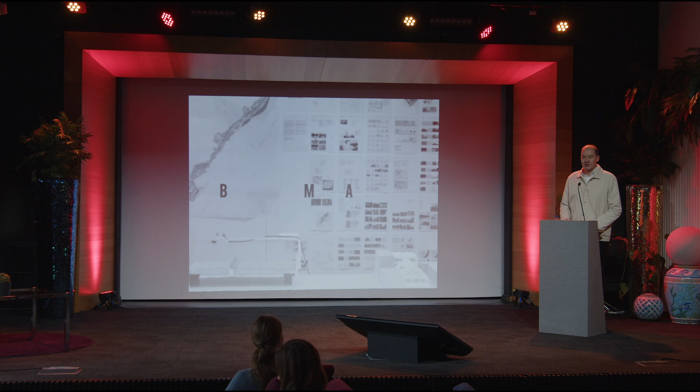Hello to everybody. Firstly, I would like to apologize because I'm having a stubborn flu. That is not due to your weather. I imported it from Brussels, because your weather is in fact very much like Belgian weather now.

I will be talking about circular architecture today, but with a special focus on the reuse of buildings, adaptive reuse of buildings. I thank you for the invitation, and I think it's very important that in a country like Estonia, this circular architecture is put forward. It proves that you're, in fact, one of the interesting countries in Europe who are working on that subject.

And I can imagine that adaptive reuse of buildings is a special thing in your country, because it might be that, in fact, you want to get rid of a lot of buildings from the Soviet period, for instance, because there is a kind of emotional connection with it. Or you're not sure about the quality of the construction of those buildings. There is no certainty about the materials used. So it might be very hard for you to develop this kind of ideas. It has been hard for us in Brussels as well. We have a kind of hate and love relationship with a lot of these buildings that I will show you, that are mostly office buildings from the 1960s until the 1990s.

But first, perhaps 10 minutes on what the bouwmeester is in Brussels. So not only in Brussels, in Belgium, since something like 2000, we installed a system of bouwmeesters in several cities and regions. It was inspired on the Dutch tradition of the Rijksbouwmeester, the national bouwmeester, that exists something like 200 years. It has been existing before in Belgium, but the tradition had been completely lost. So we imported the idea around 2000, and then we developed it and we made it better than in the Netherlands. So now they're looking to us how we are dealing with it.

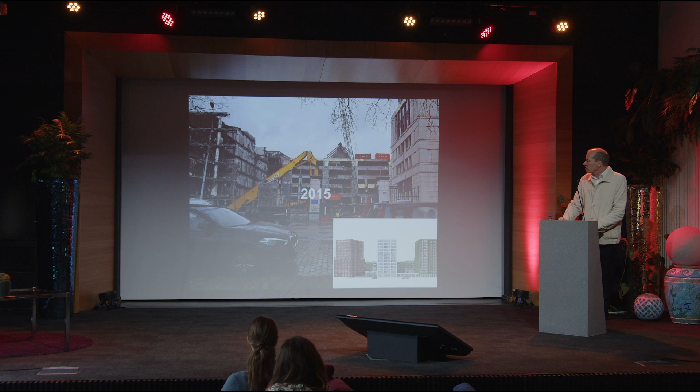To be more precise, Brussels and mentality shift. So also my mentality as a bouwmeester has been shifting, I should be honest about it. In 2015, when I was starting, I organized a competition that was won by Office Kersten Geers David Van Severen for building 3 residential towers on the site of a former empty office building. Partly this was a kind of revenge, because this is one of the postmodern office buildings by a big Flemish bank that were built in Brussels, that I protested as a student against, because they were ugly architecture, and cutting off the neighborhood behind from the canal, the water that is on this side. And then when I became a bouwmeester, of course, it was a big revenge to help demolish this building and replace it by fine architecture.

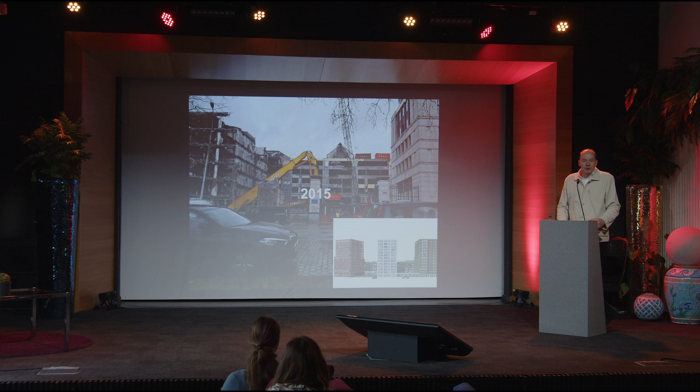On the other hand, today, I wouldn't do that anymore. We would keep the structure. We would surely replace the program of offices by housing. We would surely make better architecture and also repair the connection with the neighborhood behind. But we wouldn't demolish everything anymore. So my story will be about this mentality shift and this need to go, as your vice mayor said, for systemic change. I call it from pioneering to mainstreaming.

In 2017, we organized a public discussion on what was happening with all of these office buildings from the 1970s until the 1990s in Brussels that were becoming empty, that were being demolished to be replaced by new office buildings. What about the quality of the architecture? What about the heritage aspect? Don't we have to keep some? Even the ugliest postmodern building is representative of a certain period, so you should perhaps keep some of them. What about the reuse and the carbon emissions that go together with the demolition of these buildings? So first, public discussion. Should I go or should I stay? A punk song of The Clash.

In Brussels, you have Rotor, and you can't underestimate the impact of Rotor on the entire debate in Brussels. They have a lot of merits; they are truly the pioneers of reuse in Brussels. They've been putting it on the agenda, and they have been so generous also to share their know-how with a lot of people. So you can see a kind of influence of Rotor in the architects community and also, in fact, the public, so people like me working on the public side. The influence of Rotor is incredibly important.

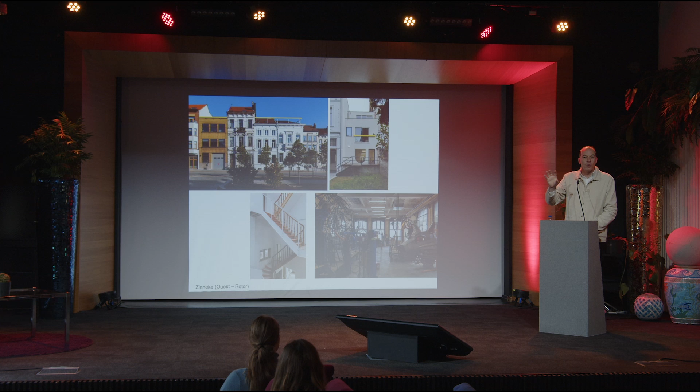Computer says no. And so with a lot of discussion with the planning permit administration, they finally agreed for the back facade, not for the front facade, that there would be a drawing with a dotted line saying, within this frame, there will be a window. So very open, not yet sure about the precise size and shape of the window. That was a big struggle and a big victory that they accepted.

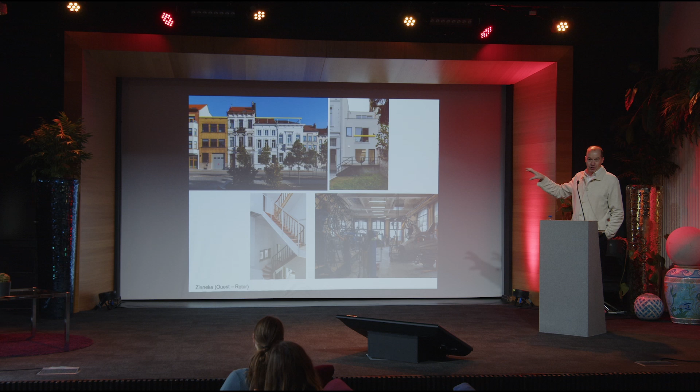And of course, the architects used it and made profit of it. So they bought a window, the one that is U-shaped, that is normally, of course, the other way. It's a 19th century window. And because now they had a kind of carte blanche within this dotted line, they decided to put it upside down to make a joke of it. So this project has been pioneering for the architecture itself, for the new kind of aesthetics, but also on those 3 levels, very administrative levels, in fact.

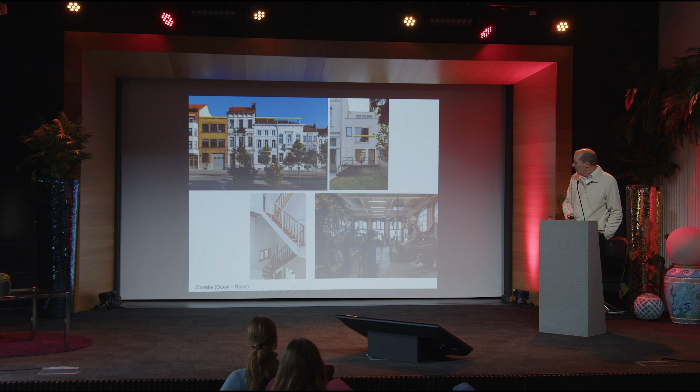Second project, that has been finished last week. So this is a Recypark, a recycling installation where you go to throw away things that will be reused afterwards. It's a project by 51N4E. And the client is the Brussels organization of waste management. It was a competition. The recycling installations in Brussels are not covered because when it rains, people don't go there to throw away their things, so they want to make it more used. And in the competition, 51N4E proposed to reuse wooden beams for the roof structure. And so they found out, together with Rotor, that somewhere in Wallonia there was a horse riding school that was empty, that would be demolished.

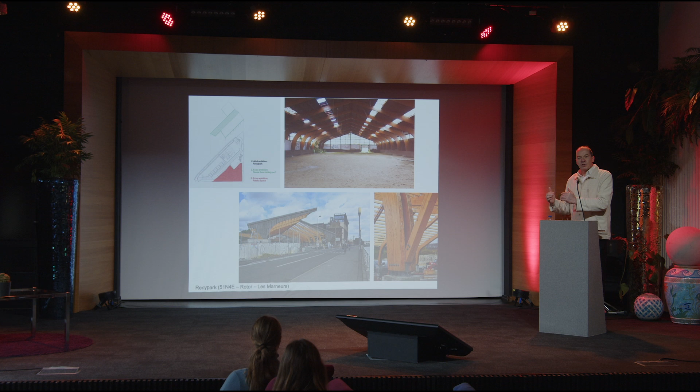They've been selecting the wooden beams over there, transporting them to Brussels, refurbishing them, and then reusing them for the construction. So not just finishing materials or materials like a window or a staircase on the inside, but really the structural elements. So you can reuse structural elements as well.

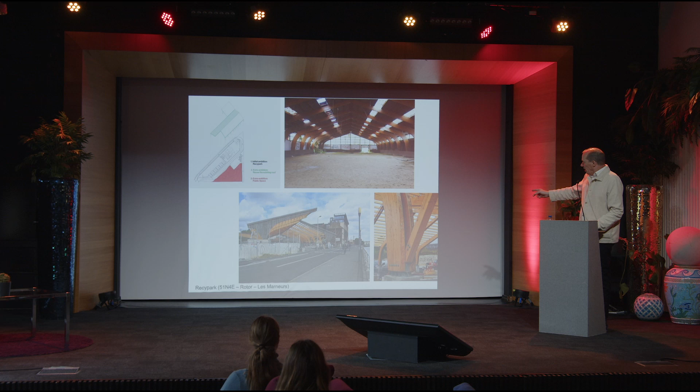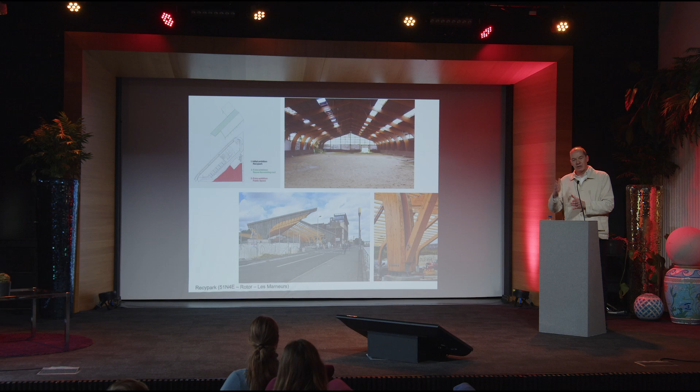It was a hard job to have certifications. So the public client was great because he supported it all of the time. He could have said, okay, let's stop now, we won't take the risk. But he went on and went on. And so in the end, for instance, that's what you see on the right below, they were forced to use 2 beams. Because if one beam would be a problem, there would always be the other beam that can take over the role. Next step.

This was one of those office buildings from the 1960s, empty, prefab concrete construction, cheap building because it's empty somewhere in Molenbeek. On the other hand, we have an urgent need for new schools. So both elements have met, and it was decided that there would be a new school in that building and that it should be refurbished extremely quickly. And so that's why the architects decided, okay, if it has to be quick and cheap, we will also use the materials that are already in the building.

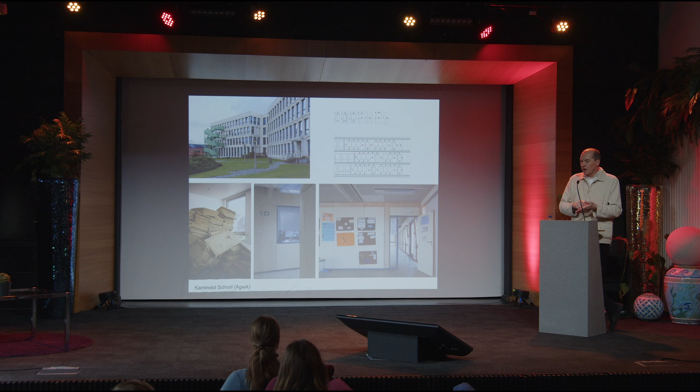So they've been reusing the partition walls, these kind of white walls that are typical for office buildings, and adding in wood the parts that were necessary to make the adjustments, so that it becomes a kind of double reading. What was an important lesson here is that in circular architecture and reuse of buildings, the inventory is crucial. So those architects spent a lot of time just writing down what was in the building. Because then you can start making the puzzle. First you have to know what is there, and only then can you start designing.

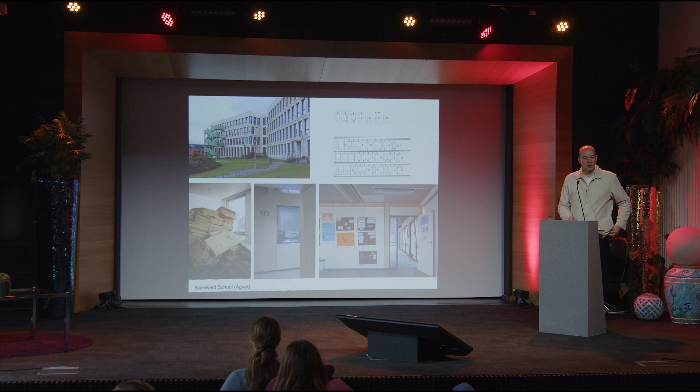So for us, that was a lesson that it's a huge job. It takes a lot of time and money. So we now recommend clients to make this kind of inventory beforehand so that it is available for all of the competitors in the competition. Project by AgwA.

And then to have one that is a bit stepping out of this kind of reuse of buildings. Circular architecture is in fact also about new constructions and about anticipating future adaptation. So not making the same mistakes as in the past. So how can we make the building ready for other uses in the future? It's a lot about anticipating dismantling. So no glue, only screws, for instance. But it's also about, and that was the case here, the structure of the building.

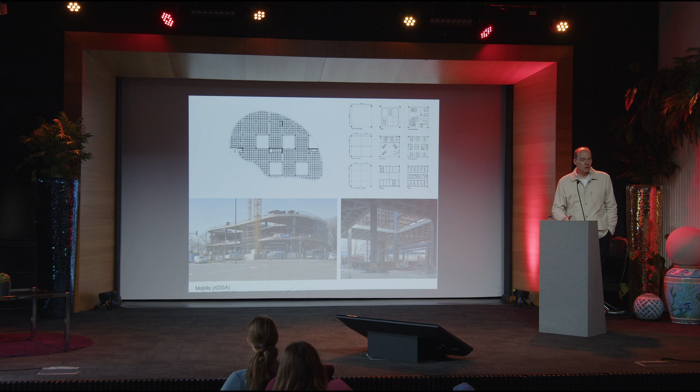So this is a new garage by D'Ieteren. That's the Volkswagen Audi car importer in Brussels. And they are very clever. The Volkswagen importer in Brussels is preparing the age without cars. So it's strong, I think, from their side. They know that they will need less space for selling cars in the future, and they are now selling bicycles, for instance, and so on. And so they wanted a building that was open for many uses. And so they were ready to pay something like 5 or 10% more for the structure, so that the structure would be able to accept all kinds of uses in the future, other bearing loads and so on.

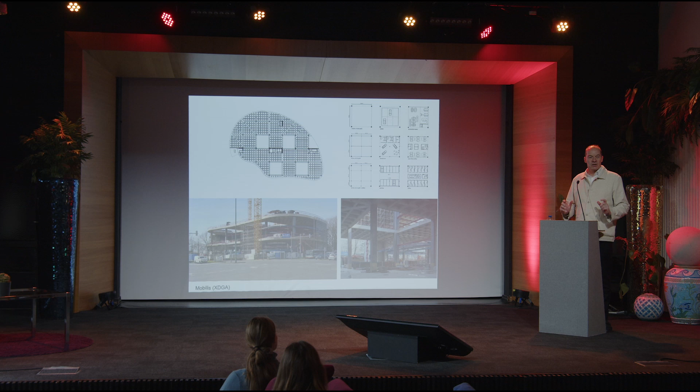The project was won by Xaveer De Geyter, who made the structure completely in concrete, on the other hand, but that's the way he is. And in fact, the waffle structure allows walls to be put everywhere. There's also a kind of secondary structure in steel. You can see the red lines in the drawing. Intermediate floors that can be removed or changed more easily. So this building is taking into account future change of use. That's also important, I think, on the level of circular architecture in the case of new construction.

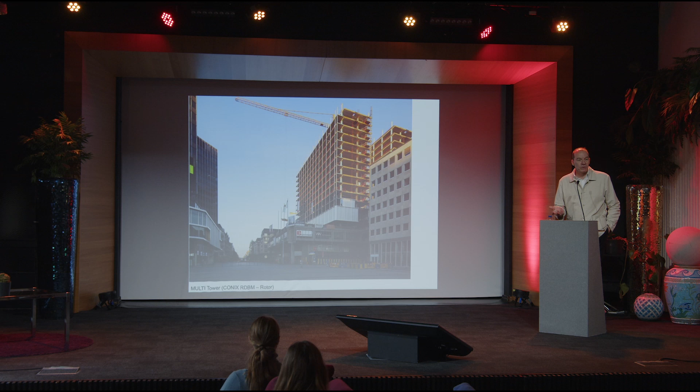That was pioneering with convinced clients, mostly public clients, but also private clients. Since 2020, we've been pushing the market, so also the standard developers who were making office buildings in Brussels. One of them, a very fine developer on that level, is Whitewood, who was already believing in circular architecture. So this was in the city center, refurbishment of an office tower for offices, keeping the structure, of course, but also being exemplary on the level of reuse.

So a lot of materials that were taken out of the building were reused on site, and also some other materials coming from other construction sites were reused. Fine materials, for instance, very beautiful granite floor slabs designed by a famous interior designer, Jules Wabbes, that come from another building. And thanks to the system of buying and selling that Rotor has been organizing, it's called Opalis in Brussels, they could be bought and brought to this site.

Also, for instance, the technical installations, the ventilation system that was on top of this building was still functioning, but not meeting the standards for new office premises. And so the ventilation system was taken down, put on a truck, and brought to Zinneke, the first project with the dotted line window that I've been showing you, and immediately installed in that building.

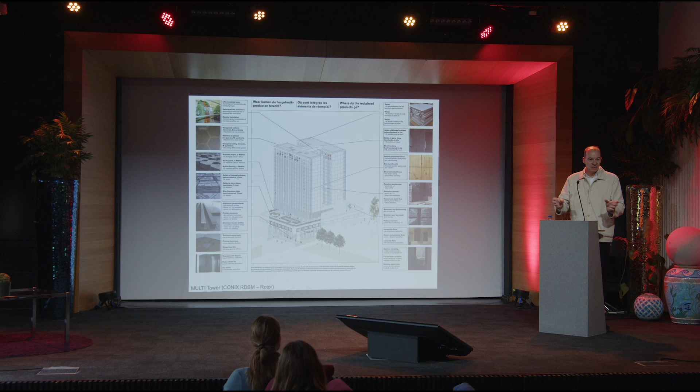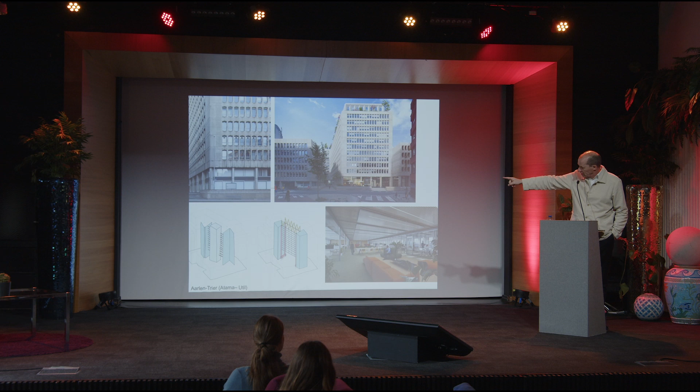Another office building in the European quarter. The developer wanted to demolish it. And all of us, me, the bouwmeester with my soft power, but also the planning application department with the hard power, just said no, you should keep it. And so finally the architects came up with a solution, because the problem was, you can see on the left side, there is a kind of big core in the middle. So the office floors were very much fragmented. So no open office floors as is usual today.

And so they came up with the idea to have a huge beam, a Vierendeel beam, on top of the building. And in fact, to replace all of the columns that were load-bearing by steel cables or something like that, so that the floors would be hanging. So that means less thick columns on each floor, and also on the ground floor an open span, and you could organize a big conference hall there, which was also necessary for the building.

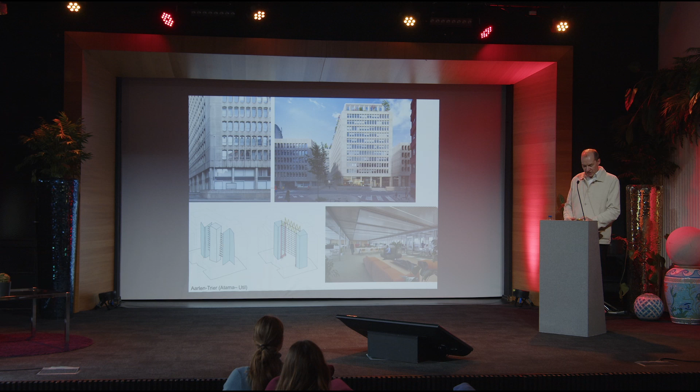So adaptive reuse is not always about physical materials and using them, about the materiality, but also sometimes about changing the structural organization of the building. For me, adaptive reuse, like in this case, is often partial demolition and partial new materials. The goal is to reuse, as a general rule, but sometimes you have, of course, to replace and to add new materials. Finally, the balance should be right.

Now it looks like in Brussels everything is fantastic, which is not the case. So sometimes, well, quite often, we have developers who just don't like reuse. So this is another office building in the European quarter. Ghelamco, a developer, wanted to demolish everything because the floor-to-ceiling height in this building is something like 240 or 250, and the EU asks for new offices something like 260. So because of this 10 centimeter difference, a whole building should be demolished. Of course, that's crazy on the level of embodied carbon and CO2 emissions that are necessary to produce a new building.

So we challenged them, and as the bouwmeester, we had a call for 3 technical experts that can help us, because we don't have this kind of specialized knowledge. So this was the proposal of Ghelamco. The problem is the red beam that is too low, and the fact that the ventilation system is below the window sills. And they were saying, okay, dear bouwmeester, if you want to keep the building and we have to renovate it in order to make it new premium offices, we have to have new ventilation, and then you can see you will only have 2.47 meters, and below the red beam there will not be enough space left, only 2.17 meters. So it's not possible. That's what we often get in this kind of discussions.

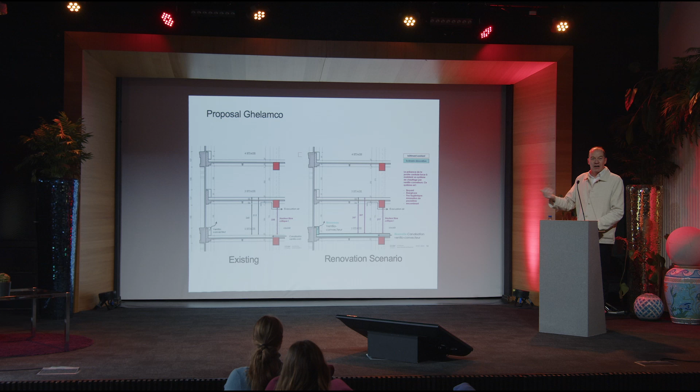I said, okay, we will ask 51N4E to make a second opinion study. And they have been developing a lot of alternatives. Okay, you could demolish the critical points, replace the critical points, something like 5% of the existing structure. You could also do something else. In scenario 2, if you remove 20% of the floors, you could replace them by wooden floors and so on. So they've been instrumental for us to prove, versus the private developer, that alternatives exist. So his story of there is no alternative was not true.

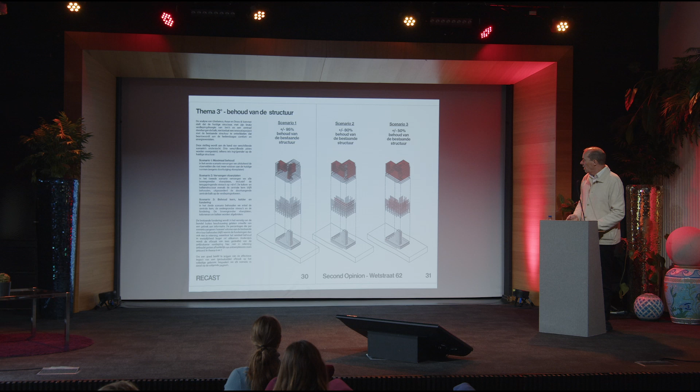So that's also important on the level of policy, that you have this kind of technical knowledge that we don't have, but that 51N4E has, that you can mobilize it and bring it into the discussion. And so that's where we are now. So that was very helpful, this kind of counter projects and, let's say, a bit aggressive position on our side. Okay, if you say that it's not possible, we will show you with our experts that it is possible. That was also challenging the experts of the developers, who were in fact saying what their client was asking for because he was paying them. It was also challenging, in fact, the professional integrity of the engineering office that was supporting the client.

If you say it's not possible, that means you're not smart enough, because here are our experts who show you how you could do it. This kind of assertive, if not aggressive, position of public authority, I think it's useful. We shouldn't be just always believing what private developers are saying.

So for now, these are 12 examples of office buildings from the 60s until the 90s that are empty in Brussels, because we have a shrinkage, of course, of the needs of office space, like in all cities, and that are now all in planning permit situation for reconverting to housing while keeping the building structure. I think 10 years ago, all of these buildings would have been demolished to rebuild housing projects.

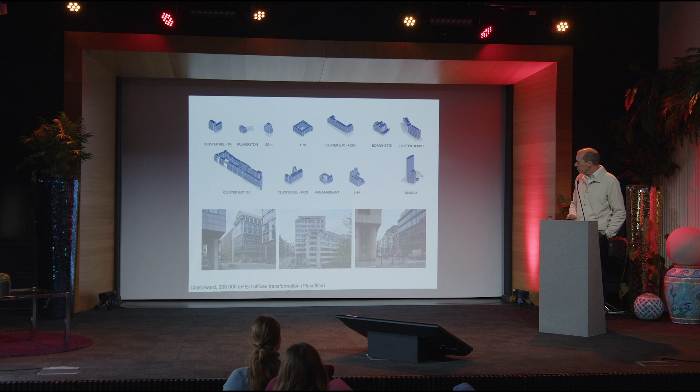My last slide is what could be, let's say, the climax of this evolution from pioneering to mainstreaming. It's the less exciting thing, but it's crucial. So the final point of mainstreaming would be that it is just into regulations, that reuse of building structures or reuse of materials is imposed by law. And so we had a lot of discussions with Rotor how to do it, because the building code in Brussels is in reform now. Since the middle of 2023, we are working on that.

First idea was to impose for all projects in Brussels a certain percentage of reused materials. That was not feasible. That's what Rotor said as well, because there is not yet a coherent classification or nomenclature of what is a reused material. So that's too early. There's a lot of discussion, how should you calculate it, in volume or in weight, for instance? That makes a lot of difference.

The other thing is that on the reuse of buildings as a whole, before, if you would apply for a building permit in Brussels and you demolish a building and propose a new building, you never had to explain why you demolish. That was taken for granted. That was not discussed in the building permit. It was only about a new building. And so we wanted to reverse the order.

The political argument, and also my argument, is we prefer to pay for low-skilled workers working in Belgium on local materials in order to clean and reuse them, instead of paying for natural stone coming from Bangladesh in unclear conditions, how it has been sourced and so on, and paying the profit of who you don't know. So it's also an ethical issue. But it's giving work to more people in Brussels. We have a lot of unemployment for low-skilled people, so that's also a political argument.

What about the example of this ventilation system that you reused, did you already have the BIM model, or how do you solve this? Do you measure everything and then? No. In fact, this is by chance. Many of them are successes by chance. Rotor was working on both construction sites, so they knew of the possibility to move them.

But that's important in the organization of the city. That's also, I think, one of the forces of the soft power of the bouwmeester, because we're working in a very transversal way, so that you can join the dots. You shouldn't underestimate how important it is that in a city there is a kind of horizontal connection, because this brings these kinds of successes.

Nowadays, for instance, that developer, Whitewood, the one who sold the ventilation system of the roof, is now doing the 300,000 square meters of European buildings in the European quarter. They have been professionalizing as well. So they're also ahead now of the other developers. For them, it's also a kind of argument. They know how to organize the filière, the streams of material reuse.